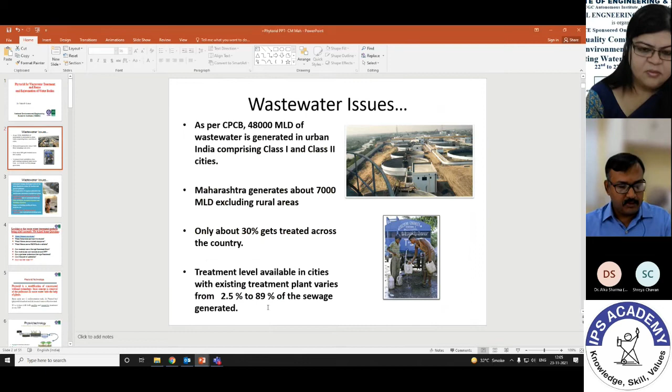The title of my talk today was Restoration of Lakes and Water Bodies. Is the slide visible? Yes sir, it's clear sir. Okay, great. When I was going through the contents, I thought let me reiterate some of the things which I wanted to talk about. So let me start by this slide, just for the sensitization of the students and the faculty members and other dignitaries in this talk.

What are these wastewater issues? As per the Central Pollution Control Board, 48,000 million liters per day of wastewater is generated in urban India, comprising class 1 and class 2 cities only. In Maharashtra, we generate about 7,000 MLD, excluding rural areas, and only about 30% of it gets treated across this country. The treatment level available in cities with existing treatment plants varies from about 2.5% to 89% of the sewage generated in these cities. So the treatment can be as low as negligible to as high as almost 90%, depending on the size and place of the city.

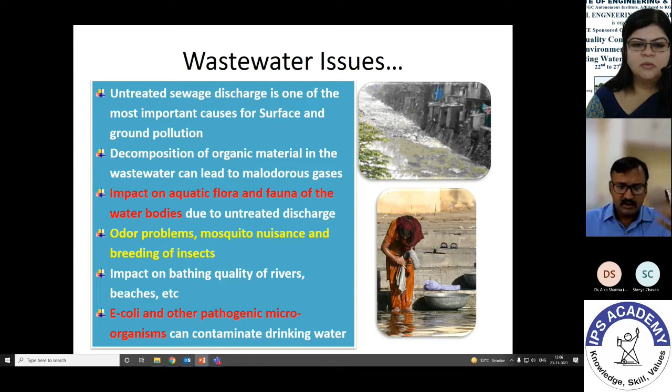Now, untreated sewage discharge is one of the most important causes for surface and ground pollution, which has been iterated regularly and which we all now understand very clearly. Decomposition of organic material in the wastewater generally leads to malodorous gases, impact on aquatic flora and fauna, odor issues, mosquito nuisance, and breeding of insects. Rivers are degraded, beaches are degraded. E. coli and pathogenic microorganisms can contaminate drinking water. So the list is endless. We have been reading all of this for a very long time.

A few years back, when researchers at NEERI were looking at the wastewater treatment methods which are still being used, they asked some questions, because most of these conventional treatment plants are dependent on certain conditions. The very first question: what if there is no power? The moment there is no electrical power, all of these treatment plants cease to operate, because you need power to run the motors, do the aeration, and pump the sewage. So we are dependent on electricity.

Question number two: what if microbes can't survive shocks? What I mean by shocks is shock loading. We all understand that in wastewater treatment there are times when there is a lot of inflow and times when there is very low inflow of sewage. These shock loadings normally are not very well absorbed by most treatment plants, and that leads to low treatment efficiencies, or sometimes untreated sewage actually flows out as effluent.

What if there is no trained manpower? Now, if people in this meeting have visited even one of these treatment plants, they must have seen that you need trained manpower to operate them. What if there are no operation and maintenance funds available? So these are some four questions which are basically related to the operational issues around our treatment plants, and which are very much the issues whenever we talk about a treatment plant not working.

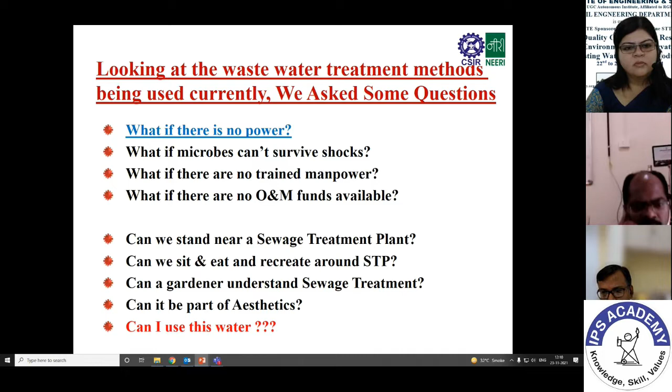So these are some of the questions which were answered in a patented technology by CSIR-NEERI, which is known as the PHYTORID technology, right? So PHYTORID is a modification of constructed wetland technology. So in my last talk, which I did with you, I talked about PHYTORID technology being employed, right? And I also talked about some of the applications last time. This time I would deal with another site-specific application in the next few slides.

But just for the information of the public at large, it is a modification of a constructed wetland technology. Basic concept is removal of the pollutants in wastewater with the help of plants. So we are using plants which are basically consuming all the biological oxygen demand of the wastewater. The basic units are not very different. There is a sedimentation tank, there is a planted bed, which is also known as the phytorid chamber, and then there is a treated water collection tank.

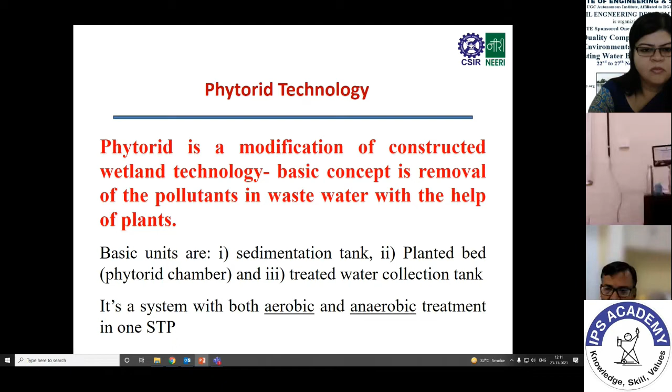So not many ancillaries. It's a very simple three-step process, and it's a system with both aerobic as well as anaerobic treatment in one sewage treatment plant, right? This is the typical schematic of it, which I had already talked about in my last talk. I'll just leave everyone to look at it for a minute.

So we have the sewage coming into the sump, then to the settling tank, then to the phytorid bed, and then the treated water tank, which is basically pumped for reuse, and it can be reused for the irrigation or gardening or farming, whatever. So some of the highlights is negligible maintenance cost. System looks like landscape and gardens. It doesn't look like a sewage treatment plant. It complies with the regulation laid down by CPCB and all state pollution control boards. Qualified for green rating credits by IGBC under water efficiencies, allows reuse of grey water up to 95%.

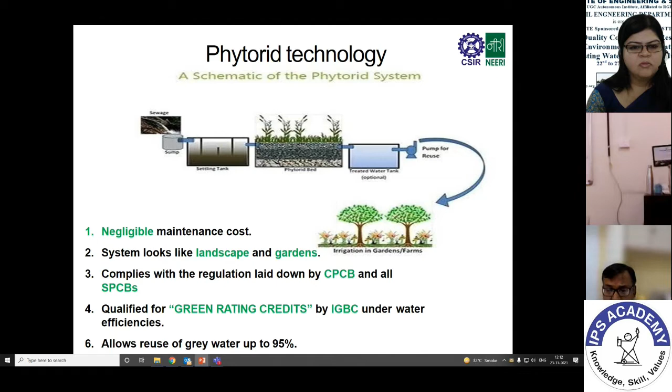Right. Some of the salient features also, it is included in national environmental policy, combines physical, biological, and chemical processes. There is no power requirement. There is low capital cost compared with a standard sewage effluent treatment system. Very simple construction, very low maintenance, no odor or mosquito nuisance, though sometimes it is reported, but it is basically because of some other reasons, not because of the technology. And it is aesthetic and it has a scalable design.

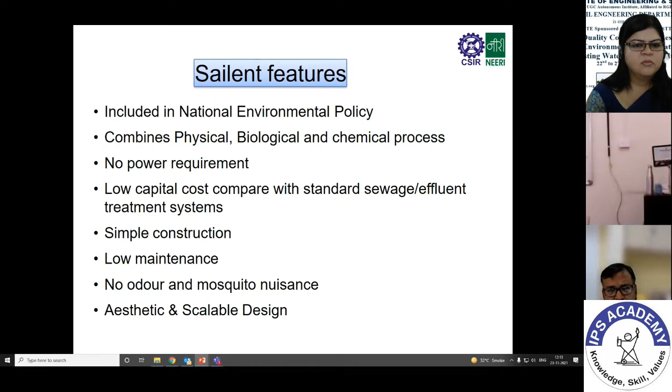So I would stop here with the features of the technology which I would be talking about today in one of the recent projects which CSIR-NEERI has completed, which is restoration of Jogila Lake at Panch Pakhadi, which is in Thane district, close to Mumbai. Right. So if you are aware of Mumbai, Thane is a sister city of Mumbai. So when we started the project, what does the lake look like, and why am I talking of lakes immediately after talking of phytorids?

Because a lot of this phytorid technology has been employed in cleanup of lakes of late, because it requires a small amount of land, and generally we have seen that most of the lakes or water bodies in the cities in our country are basically polluted by some ingress of sewage, right?

And making a very small 1 MLD, 2 MLD, 5 MLD sewage treatment plant using phytorid technology generally helps quickly rejuvenate the lake to its original form. And also the treated water can actually be fed into the lake itself, right? So that the lake is filled with water, right?

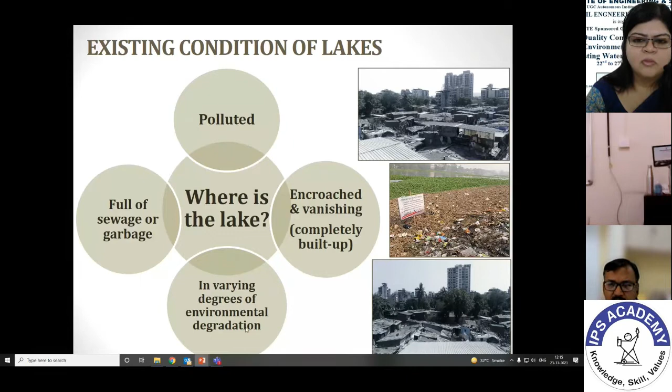So where is the lake? In these pictures on the right, we don't see the lake anywhere. When we got the project, we could barely see some part of the lake. Most of it is either full of sewage or garbage. It is encroached and vanishing, completely built up. In varying degrees of environmental degradation is what we can say.

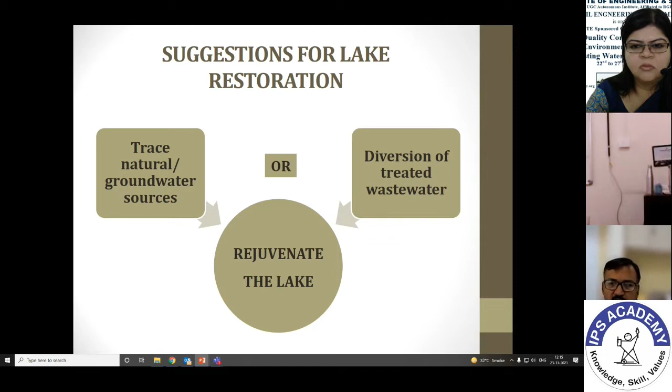So what were the suggestions for lake restoration? We said that in order to rejuvenate the lake, we can trace the natural or groundwater sources, or diversion of treated wastewater. These are the two things we can do for the restoration of the lake. But before that, what are the steps we have to take?

So these are some pictures of the lake right from the year 2000, and we can see that the lake area has been shrinking over the years. In 2000 it was almost this size, and in 2005 and 2010 we can see the encroachments all around the lake increasing.

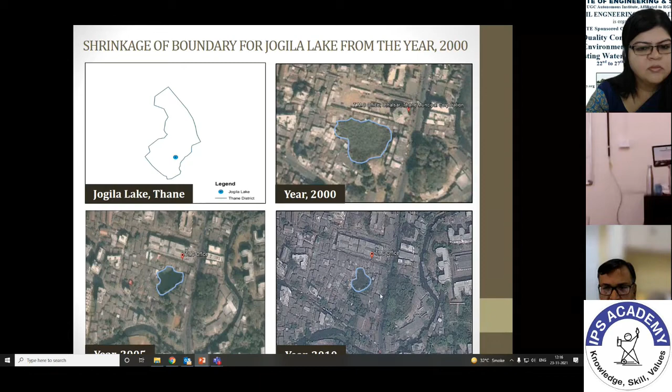So what was the update at that time? That Jogila Lake is lost under sprawling, probably unauthorized construction and rapid urbanization. Initially, it was observed that the entire lake bed was covered with concrete structures by slum dwellers and certain commercial establishments. When I say present, I mean 2019, early 2020, just before the lockdown. So that was the status then.

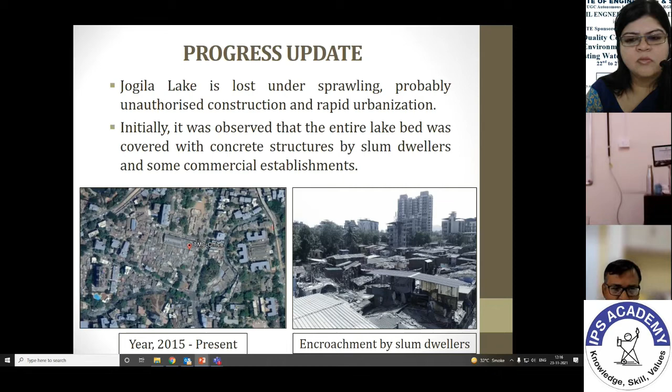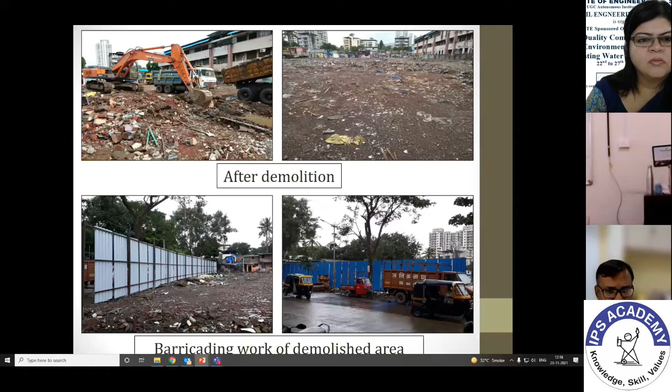So, encroachment of some slum dwellers can be seen, and the lake is nowhere to be seen actually. So the administration started demolishing the illegal structures, a lot of this was demolished, and barricading work was done of the demolished area. And we then delineated a scope of work so that a detailed project report could be prepared.

So what are the steps of a DPR preparation? I will discuss in a few slides. From the local municipal corporation we seek historical documents, city development plan, or Gaothan map indicating the location of the lake, and other available details, records or reports of the lake, such as the original area, the extent, the depth of the lake bed, and any data which would be valuable for the project implementation plan at the later stage.

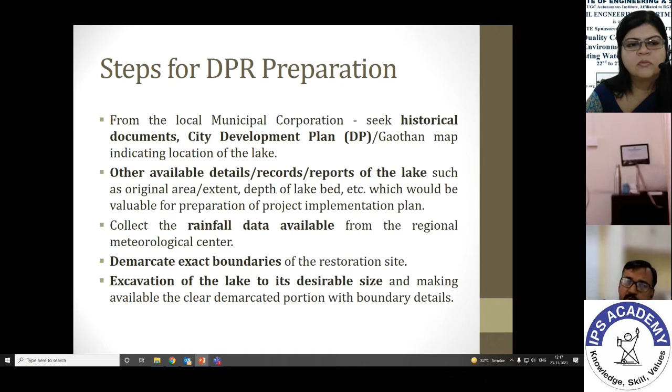Also, the rainfall data from the regional Met Center is to be collected, and a demarcation of exact boundaries of the restoration site, and it would also require excavation of the lake to its desirable size and making available the clearly demarcated portion with boundary details. So we get all of this information so that we can proceed with the DPR preparation. The other part of it is data collection and survey.

So total station surveys are required, contour mapping is required. We also need to do some testing on the soils to understand the bearing capacity. We do boreholes for permeability tests. Geophysical surveys are required. The natural stormwater drainage pattern of the area is very important to understand, because in a lot of places we have seen that because of construction activities and concretization,

the natural stormwater drainage pattern has been altered. So if we understand the original stormwater drainage pattern, we could still have some underground ways so that the stormwater can reach the lake, because stormwater is mostly clean. It doesn't require any treatment. It is pure rainwater, so it's very good for the lakes. Aquifer tests and analysis for wastewater quality are some of the other things which are also required.

Is there a question?

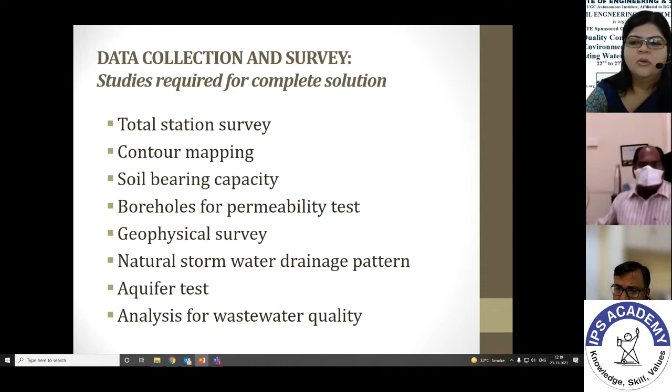Sorry, sir, there was some disturbance.

Okay, so what are the options now? So I talked about recharging the lake by natural streams and rainwater. So the approach would be to study the natural stormwater drainage pattern of the catchment area and the probability of these natural streams recharging the lake, because of urbanization, rapid urbanization. Probably the stormwater may never reach the lake, right?

A very classic case study, which is also being taught in first year engineering courses these days, it's also a standard textbook now, is how the lakes in Bangalore city vanished over the years. So it's a very pertinent and a very well-known factor that Bangalore was known as the lake city at some point of time.

It still houses a lot of lakes, but a lot of them were lost because of the increased demand of houses when Bangalore became the first Silicon Valley in our country. So a very rapid urbanization led to mass destruction of these lakes, and most of the lake beds were actually covered, and buildings were erected there.

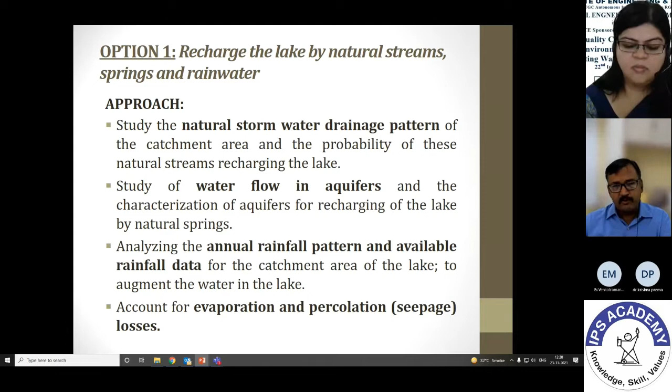Also, the study of water flow in aquifers and characterization of aquifers for recharging of the lake by natural springs, if any, in the area. Analyzing the annual rainfall pattern and available rainfall data for the catchment of the lake to augment the water in the lake, so as to understand how much water would normally be falling in the lake. And we also account for evaporation and percolation or seepage losses, right?

Option two is recharge the lake by diversion of treated wastewater. So if we do have any wastewater treatment plant around the area, can we actually divert some of that treated water to this lake? So quantification of volume of treated wastewater required for the recharge of the lake, provision of inlet and outlet arrangements of the quantified volume, conceptual design of the appropriate treatment system, and assessment of space adequacy. So is there a possibility of it?

We also go for the analysis of site-specific requirements related to installations, continuous operation and maintenance of the system. So just beyond the lake, is there enough space available for any kind of installations we want to do for O&M, right? Preparation of basic design for implementation of the recommended treatment option. So the treatment option is not only phyto; it can be any wetland technology or other conventional treatment methods. Provide a technology implementation plan along with detailed estimation of project cost, and then submission of the final report with design drawings and cost estimates for the execution of the project.

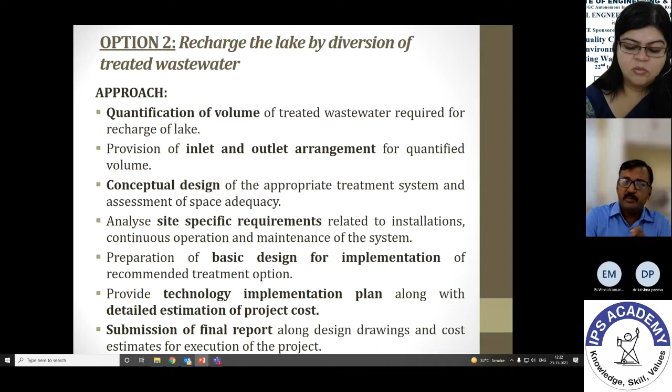So I'm basically taking it step by step from our experiences of doing this project, right? And this was the conclusion of our survey report. So the current site had four shallow open wells, which tap an unconfined aquifer. Most of the well water was polluted by percolation of domestic drainage water. Hence, using well water was difficult either for domestic or gardening purposes, and no bore well was located in the site. And the present water table showed a gradient towards the lake area. So that was a good part.

Silt, sand and clay formation of sedimentary deposit and jointed, fractured and weathered amygdaloidal basalt are observed, which were water-bearing formations. So the geology of the area is suitable for carrying the lake. The site may have both unconfined and confined aquifers, which was not very clear. The resistivity data showed that the average depth of bedrock or hard rock was about 6.5 meters below ground level. So there is scope to dig the lake up to 8 meters below ground level.

And if the groundwater is to be tapped, the lake will have to be further excavated below some 8 meters. And the final word was that the restoration of the lake will have to be planned and estimated by a combination of both natural resources and diversion of treated sewage or wastewater through sustainable treatment technologies. So that comes to the culmination of our initial almost a year of work, right?

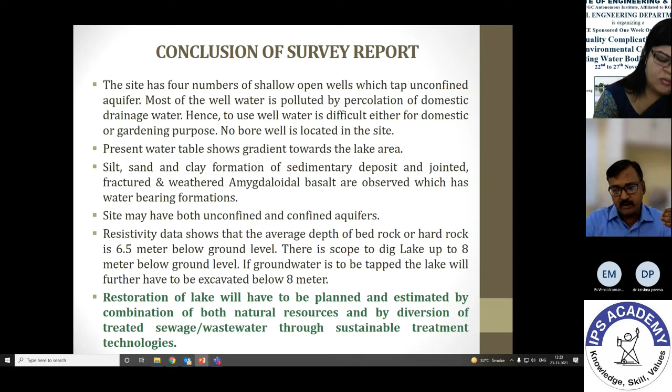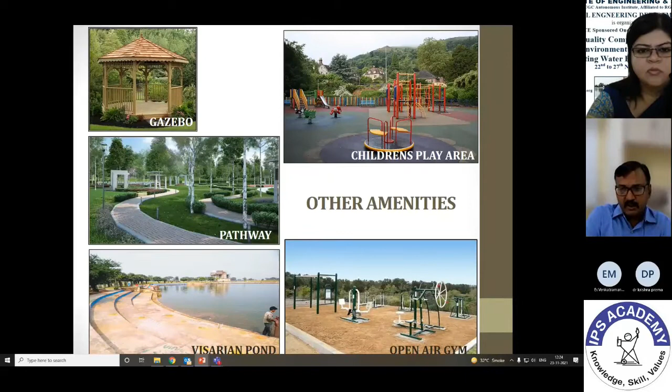These are some of the methods which had been employed in our previous studies, like Gabion wall structure for bank protection. So we have seen that normally, if you don't have these kinds of structures, the water may flow out of the lake, right? So these are some of the examples of it.

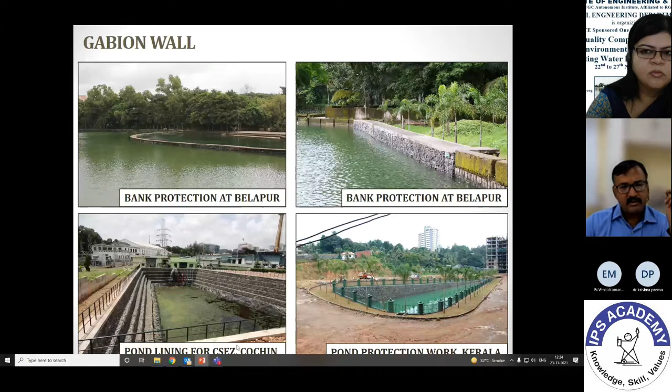These are the first two pictures. Bank protection at Belapur. These are in New Bombay, right? This is pond lining in CSEZ in Cochin, and this is another pond protection work in Cochin.

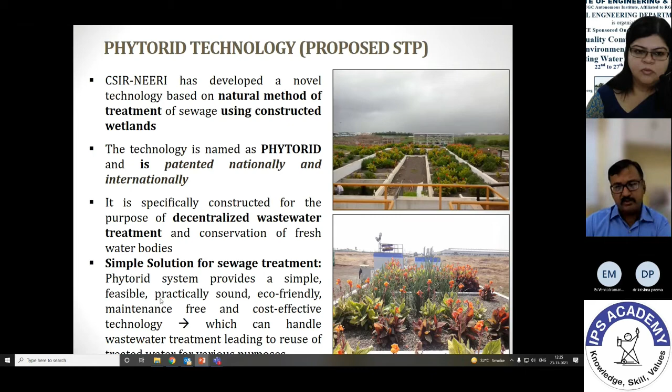And we proposed PHYTORID technology, the benefits of which I have already talked about. So, I will not go over this again, but I would just say that it's a simple solution for sewage treatment, right? It's eco-friendly, it was very much doable, right? And we have talked about filter media and plants, right?

So, the technology is basically a subsurface flow type technology, and the wastewater is applied to cells or beds, right? Which are filled with locally available porous media. So the filter media basically is a unit which is using gravel, stone, and debris, right, which is available locally, and some plants which are aquatic, semi-aquatic, or ornamental, and also flowering species at times.

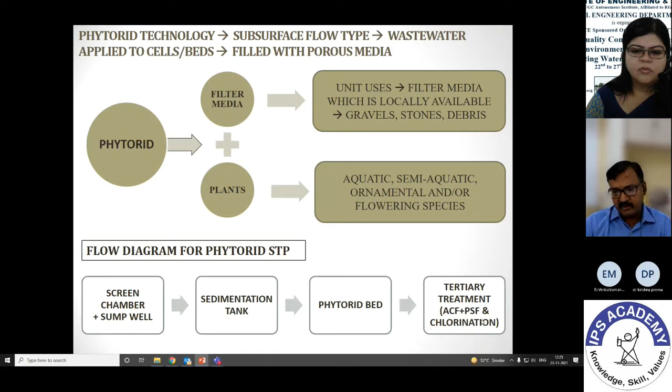So, as I said in the beginning, there's a screening chamber and a sump well, a sedimentation tank, a Phytorid bed, and then we do some tertiary treatment using ACF plus PSF and chlorination, right? And this was the last known status of the lake, which was in June 2019, right? So the barricading had been done, the excavation was in progress, right? Beyond that, the work got stopped because of lockdowns and no funds. Again, the work is now being started.

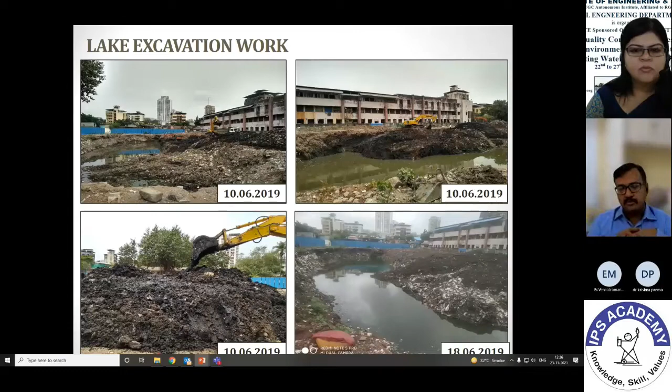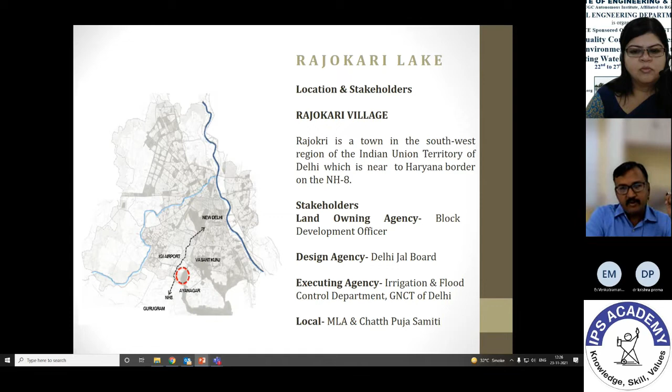So this was something which had been done very recently, so I wanted to talk about this work. I have other examples, like Rajokri water body, which we did some time back in New Delhi. It has some good pictures, so I thought let me share this one in this talk. So Rajokri is a well-known town in the southwest region of Delhi on the Haryana border, and the picture speaks a lot for itself.

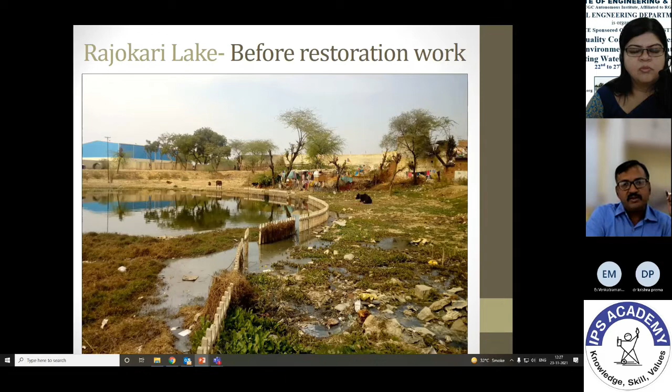The lake was totally sewage laden, and it was not in a very good shape, right, before we started the restoration work. And the site was fully enclosed by an existing boundary wall which was stopping the flow of surface water from a larger catchment area to the water body, and punctures had been created in the wall along the Abadi edge to allow surface drains carrying grey water. So instead of fresh water coming into the lake, grey water was actually going into the lake.

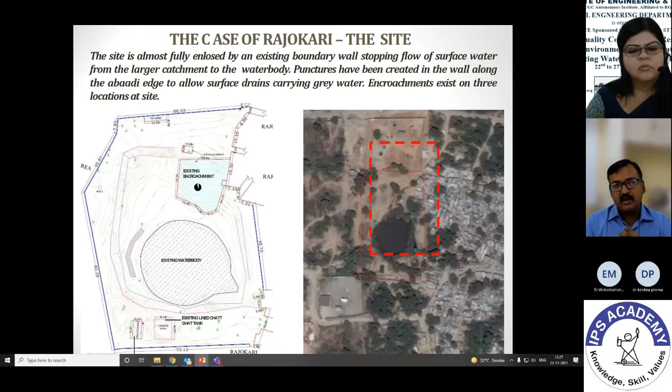Encroachments were observed at three locations at the site, right? High contamination levels were observed. Sustained solid waste disposal was there. Sludge deposits are there. You know, there was no willingness for anybody to even look at the lake, right? It was totally neglected, right?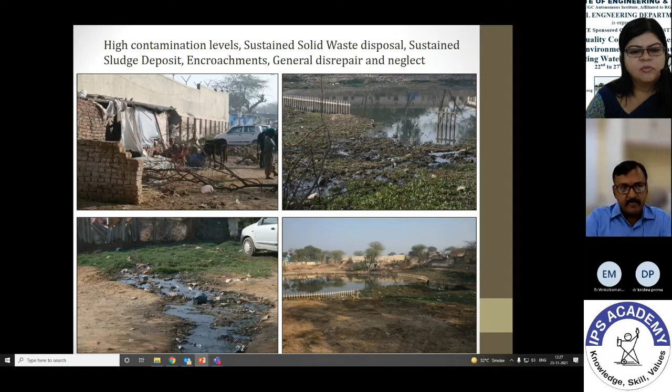So we came up with a restoration plan wherein we said how we can trap and clean the water body, how we can remove the historical sludge which is there, creation of enhanced capacity to hold monsoon flow at the site, then restoration of the larger catchment of the water body and its reconnection, right? Because the lake was covered by boundaries from all sides, the naturally flowing water was not coming to the lake. Appropriate creation of ghats in an environmentally friendly manner, which you will see in the pictures next, right?

Creation of ecologically designed and easy to maintain landscapes for use by the public, and putting in place a management regime which is sustainable for the long term, and which is workable with the community as a key stakeholder, because the people who are dwelling in and around that area are the ones who would hold it as a gem of that area. So if you create something very beautiful, people would not want to then further dirty it.

Like a very classic case of Indore city, which has now come number one in India again for cleanliness, right? Fifth time in a row. So congratulations, people of Indore, that they are again number one. And what I realized when I was last in Indore is that even if by mistake you throw garbage somewhere, somebody will stop you and say, boss, please pick it up and throw it in the dustbin.

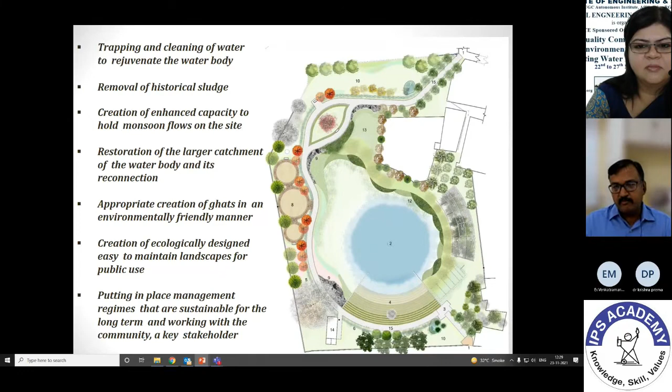That's what engaging the stakeholders is. People of Indore have actually taken it up: okay, now we are clean and we want to remain clean. And I think that is what is pushing it, more than any government policy, the participation of key stakeholders in the process.

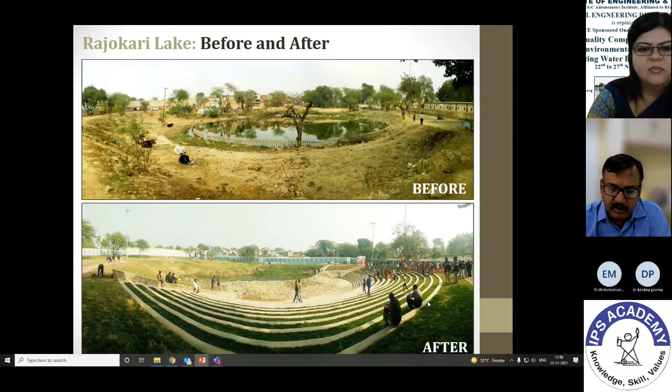And this is the Rajokari Lake before and after, right? So you can see the whole area has been transformed. The landscaping has been done in the picture below. You can see, right? So it was one of the very successful projects which was implemented by NEERI. So you can see the beautiful landscape now. So all these trees were there only. They were not planted. They are hundreds of years old, right?

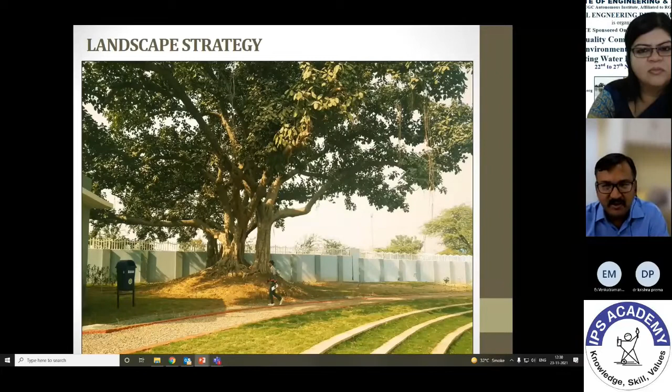But the whole area was restored, and the strategy was basically water harvesting, and then we created some swale and bioremediation grasses, seasonal ponds. So the levels and grading of the landscape was planned to facilitate water harvesting. The pathways and hard areas would all be connected through natural swales to catch the runoff from the ground. The grasses around the ghat would clean the water from the swale through bioremediation.

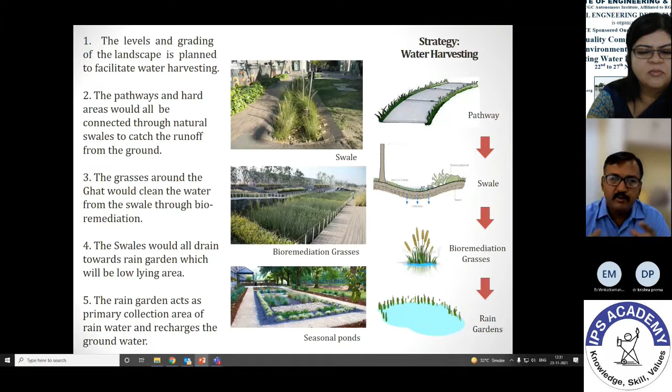The swales would all drain towards the rain garden, which will be a low-lying area, and the rain garden acts as a primary collection area of the rainwater and recharges slowly the groundwater. Right? So a very beautiful amalgamation of all the thought processes and landscape strategy. So this is another depiction of the same thing which I just said, how the drainage process would happen.

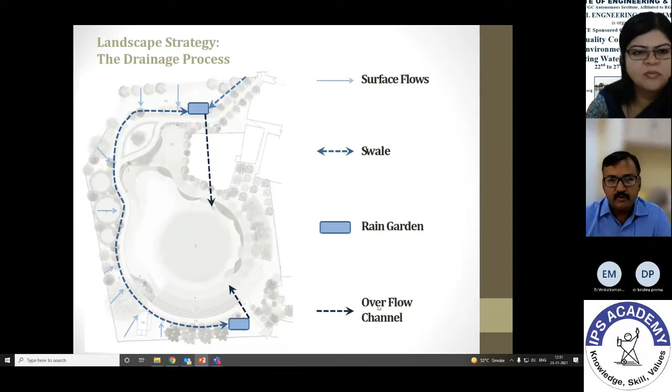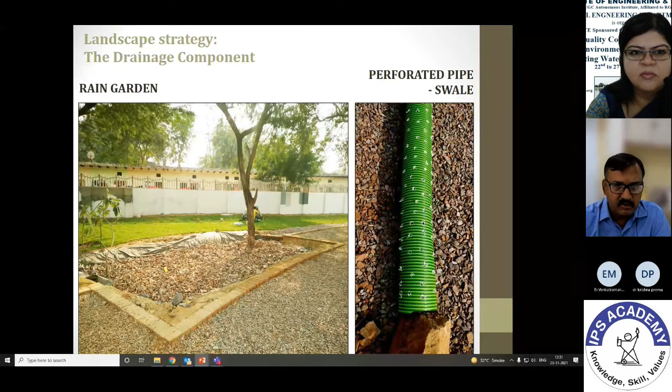And what was the ecological impact? We could restore the flora and fauna, right? Sighting of migratory birds, kingfisher and ducks was seen in 1 year of the project. Enhanced groundwater recharge with good quality of water was there. Clean water body resulting in eradication of diseases in the area. Social impact, huge social impact.

People were connected to the water body, right? People now have a community space for recreation. Children's play area is there. Safe public space. All antisocial elements and activities ceased to exist. Community ownership. The Chhath Puja Samiti ensured general upkeep of the water body, right?

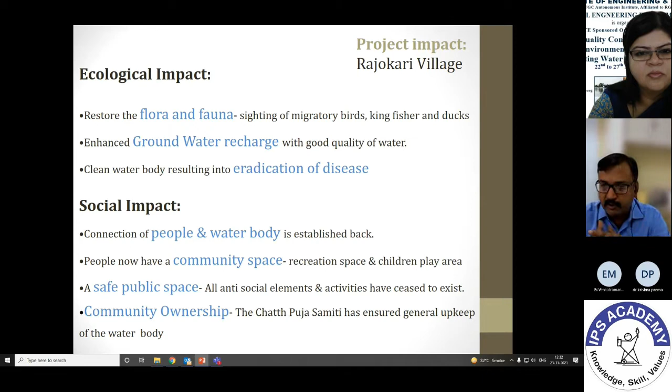So that is how we could actually engage local public participation and actually rejuvenate a lake. So it's not only the government, it's not only the policy, it's not only the fund, but it's also the stakeholders' engagement, which is very important when we talk of some of these cases, right? Another similar project by NEERI was Shahdara Lake, that too was in Delhi. So treatment of wastewater through Phytorid technology for revival of Shahdara Lake, with lake bed surface rejuvenation.

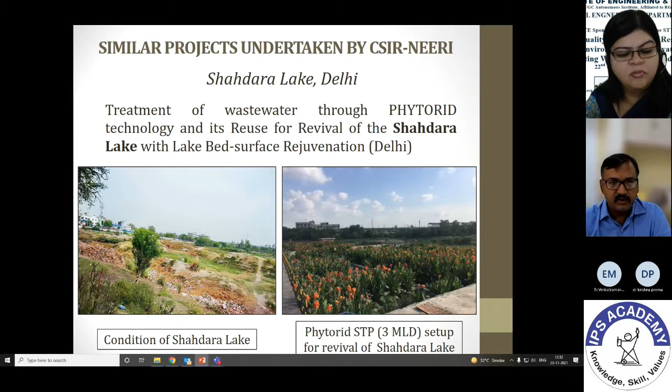Telibandha Lake, which is in Raipur, right? It was the ex situ lake treatment system. So treating inlet sewage before discharging it into the lake. Then we were combining two inlet streams into a single plant of capacity 1.5 million liters per day, right? Setting up a 1.5 MLD Phytorid-based sewage treatment plant, and it basically consisted of the same screening, sedimentation and Phytorid tanks. The in situ lake treatment was done using floating rafts.

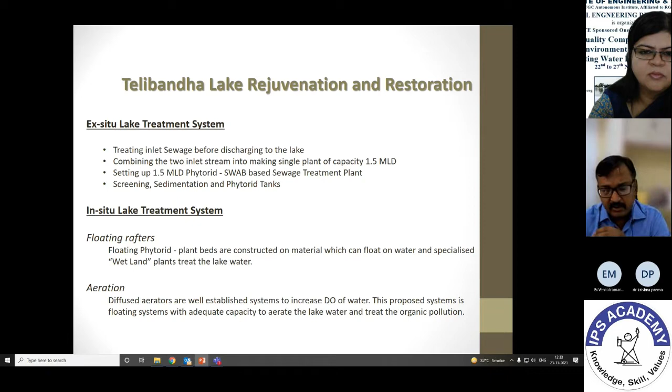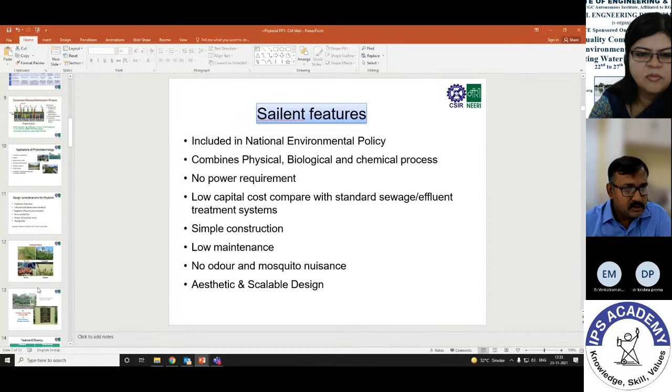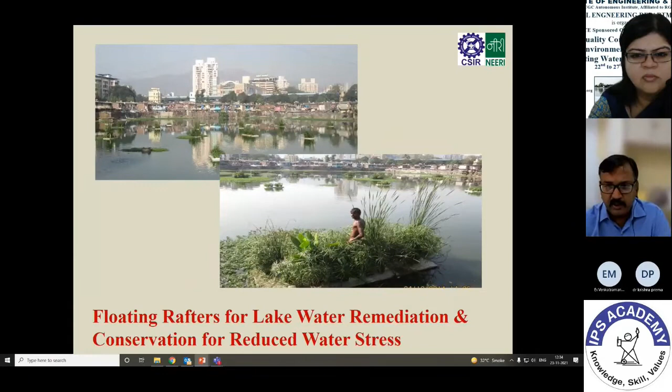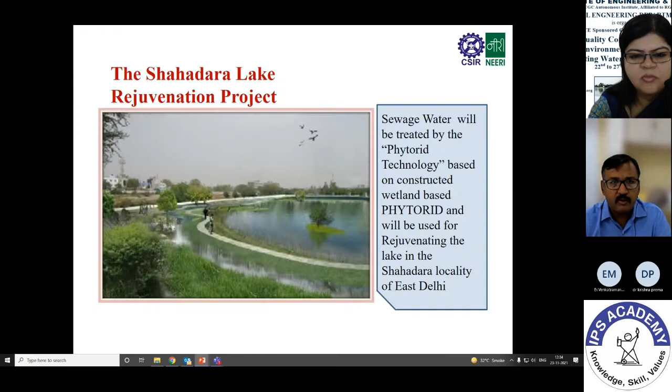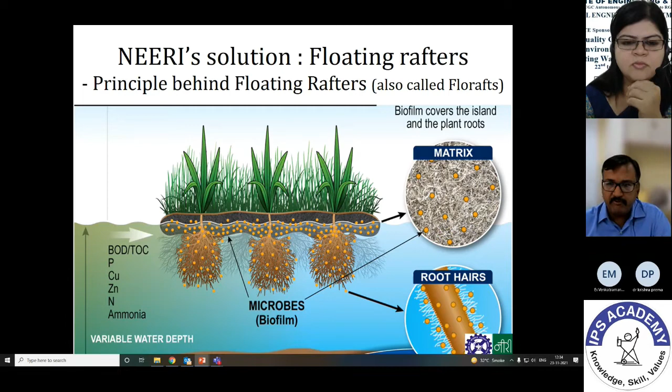And I come to this lake again, Shahdara, right? And what is NEERI's solution? What are floating rafts? What is the principle behind floating rafts? Also called florafts. So we all understand that there is a biofilm which covers the island and the plant roots, right? So there is a matrix of a light floating material, and the plants are actually sewn into that. So the root has actually developed a biofilm with microbes.

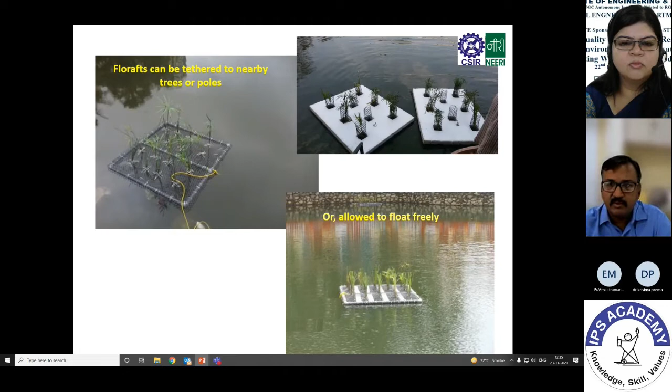These florafts can then be tied down to a nearby tree or poles so that they don't flow away, right? They stay in a narrow zone of water. And in these pictures, you can see some of the florafts which are designed. How does it work basically?

So carbon sequestration occurs, leading to fodder generation for cattle and biomass for fuel, which is about 50 to 70 kg per hectare per month. It reduces evaporative losses by almost 30% by covering the lake surface, and leads to growth of fishes, thereby aiding water conservation, local fishing and livestock feed.

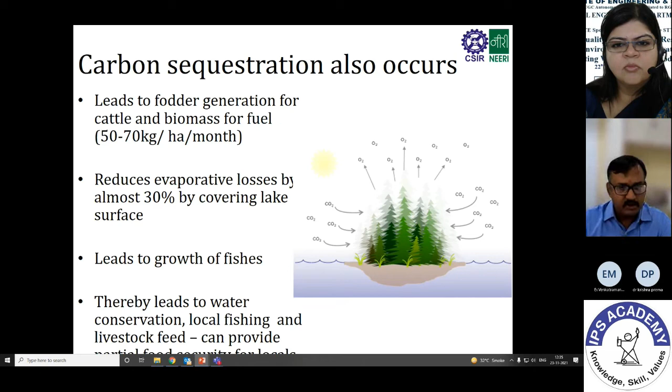This is another lake in Thane, Makhmali Lake. Before installation, it was highly eutrophic, clearly visible in the lake. After installation, these are the floating rafts which you can see in the lake.

The status before was BOD more than 200 milligrams per liter, TSS more than 180 mg per liter, phosphates and nitrates greater than 30 mg per liter. After installation, BOD reduced by almost 90%, in the range of 10 to 20 milligrams per liter. TSS also reduced by more than 90% to 10 to 15 mg per liter. Phosphate went down to just about 1 or 2, and nitrates were in the range of 5 to 10.

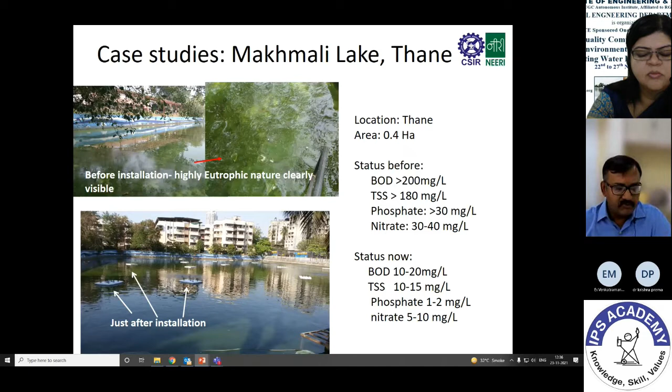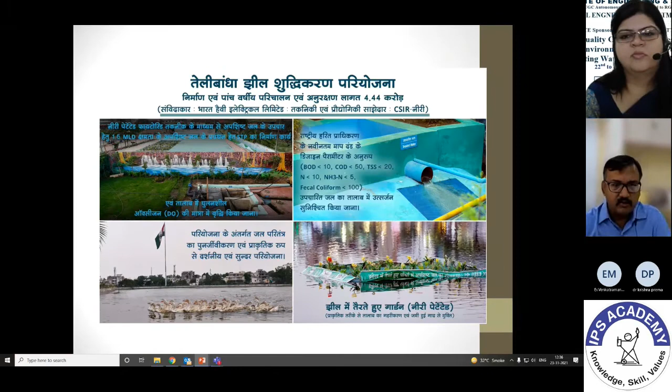So all this was achieved by just floating some plants in the lake body. These are some slides on floating rafters I wanted to share, along with some news clippings showing how the phytorid-based treatment plant has done great. The Telibandha Lake model also bagged the National Excellence Award, and Raipur Smart City got the National Excellence Award.

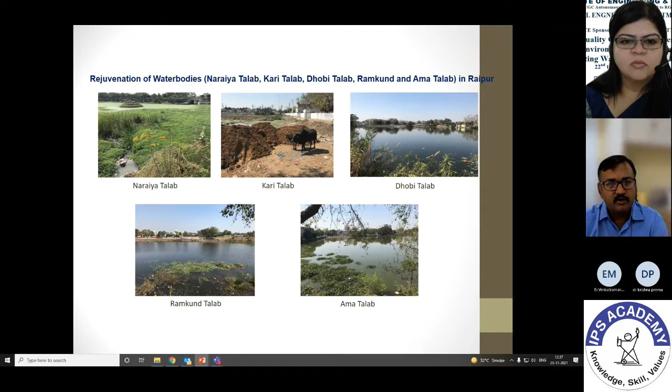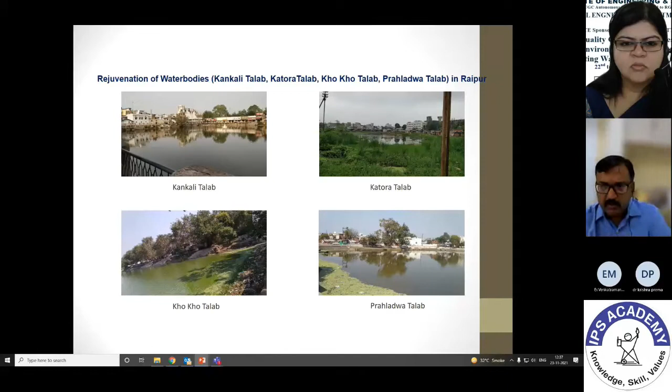These are some of the other water bodies where we are working in Raipur now - Naraiya Talab, Kari Talab, Dhobi Talab, Ramkund Talab, Ama Talab. You can see all of these are not in great shape right now. And then there's Kankali Talab, Katora Talab, Kho Kho Talab, and Prahladwa Talab. So a lot of work is being done.

I would want to stop now, and say that the presentation is adopted from reports of various studies by scientists and technical staff from CSIR-NEERI, who are highly acknowledged. The inventors of PHYTORID technology and florafts are also acknowledged. Thank you, I'll be happy to take questions.

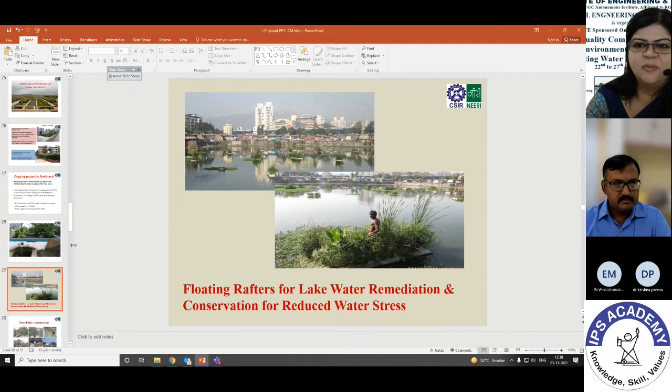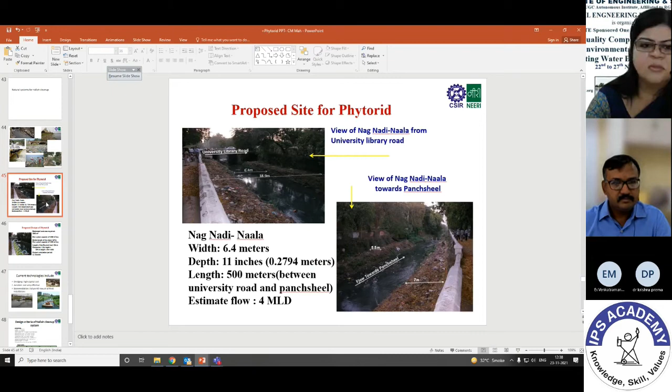Can phytorid be used for restoration of nala and canals as well?

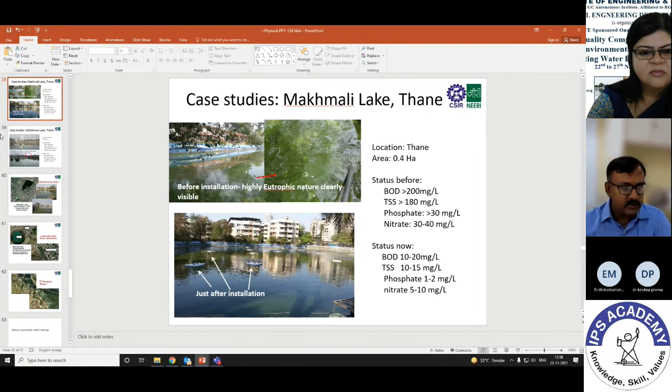Thank you for asking. That was precisely what was left out. We have been working on Nala cleanup, so let me share a few slides on it. Yes, I missed the Nala cleanup part of it, and thanks for asking.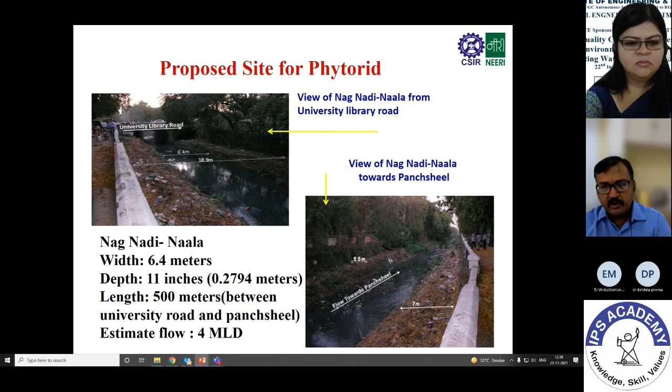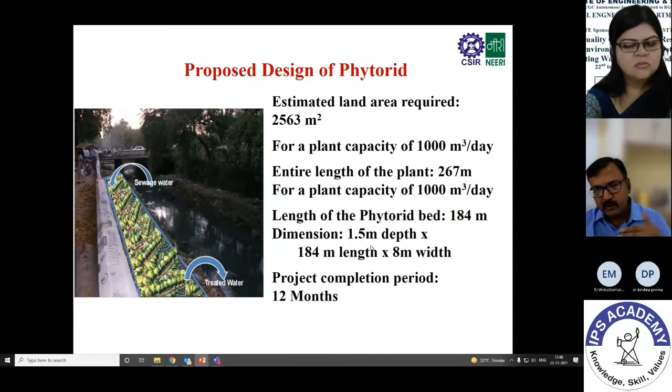Length of 500 meters between University Road and Panchsheel was adopted to install the Phytorid system, with a plant capacity of 1,000 cubic meters per day. Entire length of the plants which we estimated was 267 meters, and length of Phytorid bed was 184 meters, about 8 meters wide and about 1.5 meters deep.

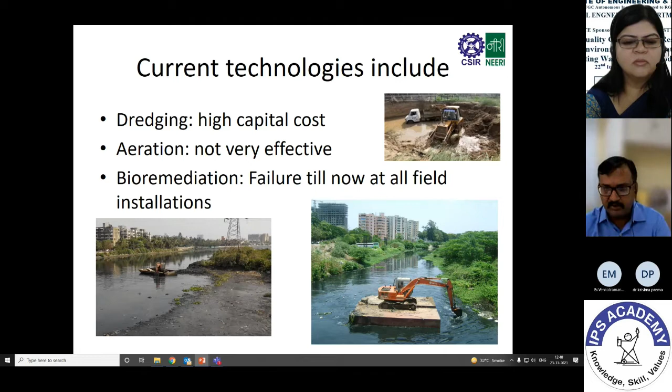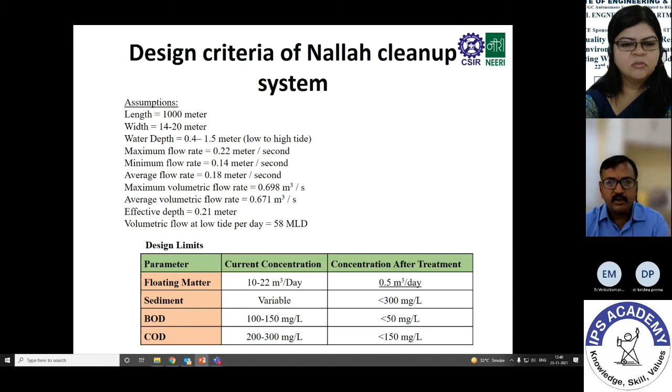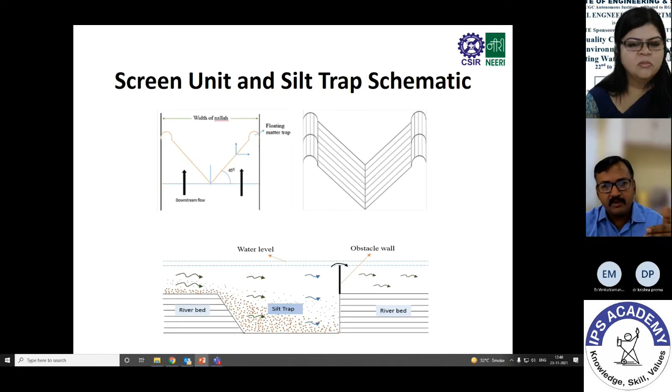So, anybody else who would like to ask anything?

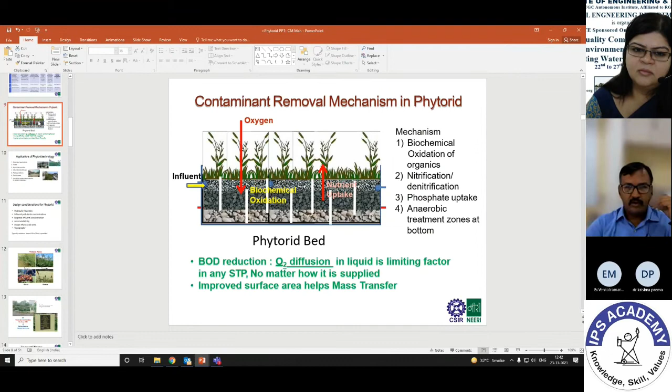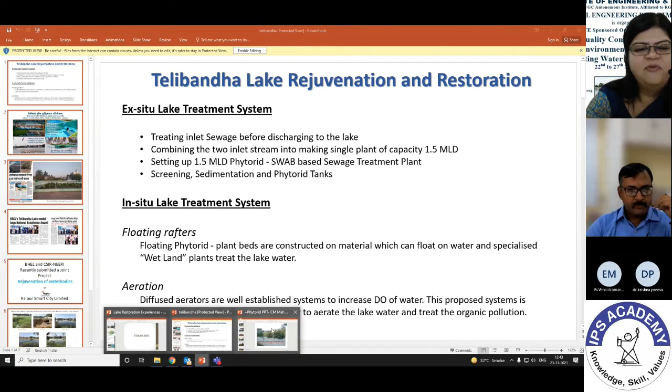Okay, I will just go to that slide. So we have an array of plants which you can use there, right? We have wetland plants such as bulrush, nutsedge, canna, cattails, which are locally available. We can also go for flowering plants, grasses, trees, and climbers around that area. If you're typically talking about plants used in phytorid only, then these are the ones I mentioned, which are basically wetland plants.

Most of this phytorid technology is implemented through technical know-how transferred to the license holders of NEERI technology. So you can contact the NEERI headquarters, and they will let you know who the partners are, as they have all the technical know-how on how to implement it.

Venkatramanji, did I answer your question? Venkatraman sir, do you have any other query? Yes sir, thank you very much, sir. Thank you so much.

So, anybody else from the participants?

So there is no restoration work in Indore regarding phytorid? No, currently in the last 1.5 years things have been slow. We were in talks with a lot of smart city people, but there are a lot of projects going on. My senior Dr. Ritesh has been working closely with the MP government, so I'm sure he might have some news around it which I'm unaware of right now, but I'll let you know. Otherwise, I've heard some things have been done in other towns in MP, but for Indore, I haven't heard about it.

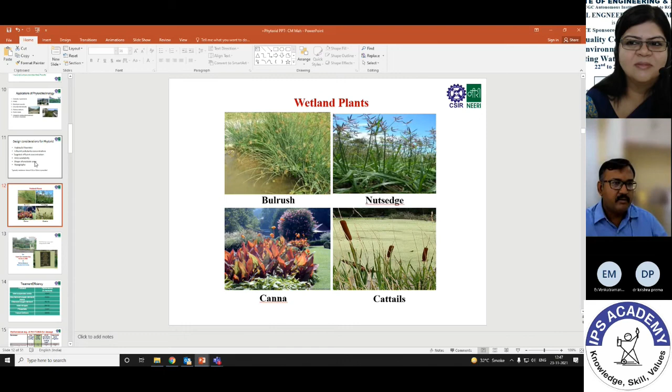Did you also test the water after installing the phytorid system? Yes, I talked about it last time, that's why I didn't cover it much today. But if you look at the efficiency of phytorid treatment...

This is a performance comparison with other technologies, based on published data. BOD removal is 87 to 95%. Sludge generation is negligible. Equipment required is minimal, excluding screen and grit removal, mostly gravitational flow. Unlike conventional systems, it doesn't require a skilled operator or any power.

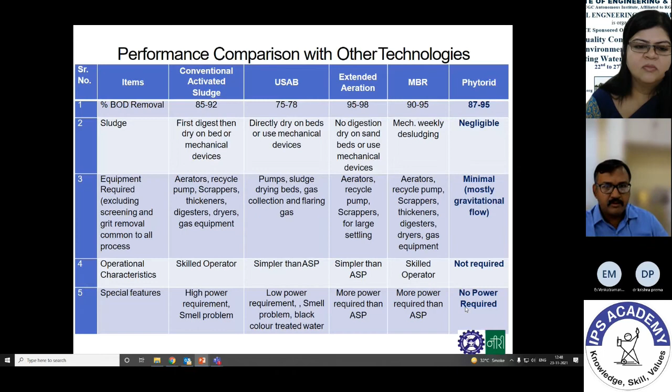These are the mechanisms, applications, and design considerations, along with the treatment efficiency of the first phytorid plant, established in 2006 at the Kalina campus of Mumbai University. These are the percentage removals achieved, and from 2006 to 2021, over 15 years, the technology has grown.

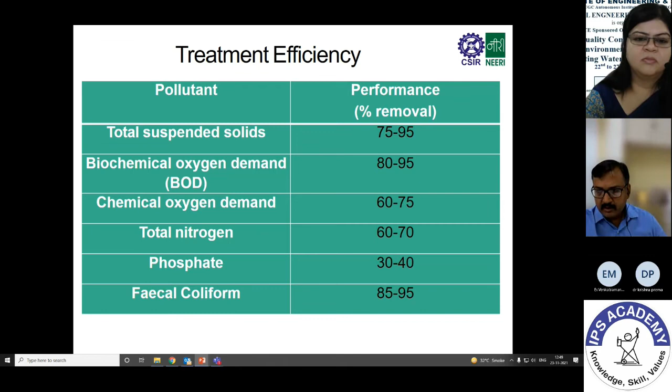It started with a very low loading rate, and now I've heard people have scaled it up to 10, 20, maybe even 50 MLD. So it's definitely a scalable technology.

Regarding application on an individual home basis, is it possible, sir? Like independent houses, or can a community even use this? On a community basis, we can say yes, because we need a certain minimal flow. But I haven't heard of any experiment yet for an individual home basis. Maybe I should find that out.

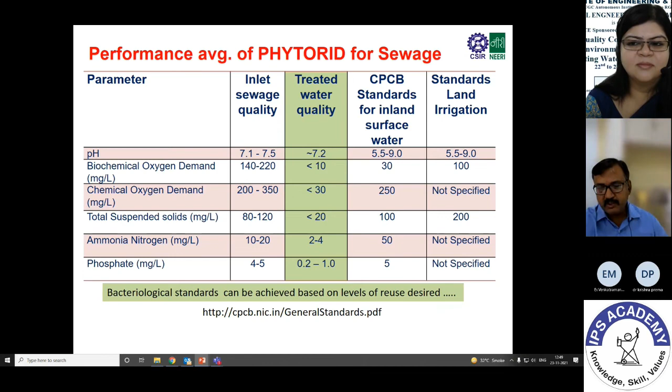Maybe what you're looking at is a colony basis. It can be done like in Indore, where there are so many colonies, so it can be done at that community level. It will also give you a good garden and some greenery in the area where the sewage is flowing. So it can be done, especially for open nalas and drains—those can be treated well.

Thank you so much, sir, for the wonderful technology you've shared with us. Thanks to the inventors of the technology—I am only a spokesperson today. A lot of good work still needs to be done. Thank you for inviting me to share some of this work.

The way you explained it was very nice, sir, thank you so much. I've been a teacher all my life, and I love to talk. The only issue is I can't see students now, only my screen. But it's always a pleasure to come back to any classroom and share information and knowledge.

There are some advantages that we get knowledge from you, but some disadvantages that we're not able to interact with you in person. No, no, but I think things are opening up now, so maybe next time we should meet in person, and I can come to your college in Indore—that's always fun.

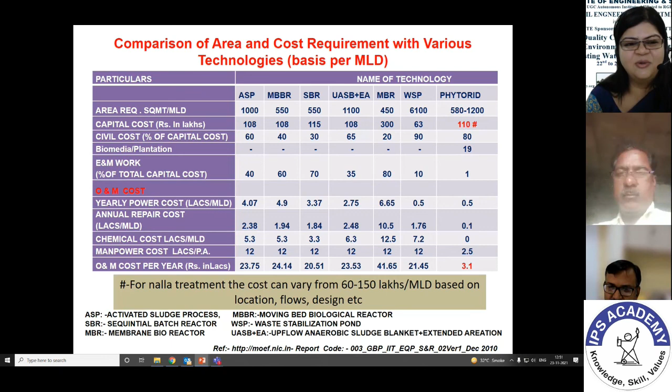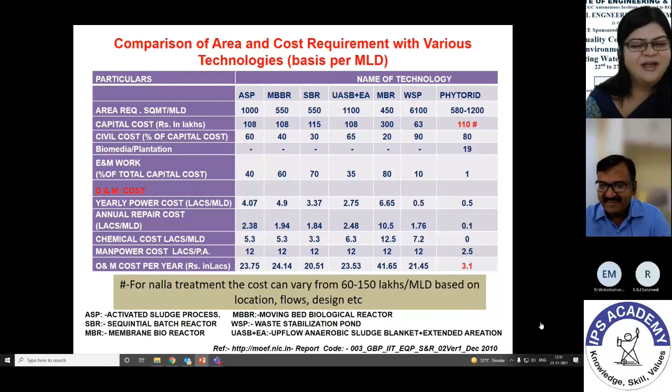Thank you so much, sir, for giving us such valuable information and taking time from your busy schedule. I hope I finished in time. I think we're actually early—you gave me an hour and we finished a bit quickly. Whatever knowledge we get, even in short time, is more important than sitting for 1.5 hours and not understanding a single point. It's better to keep it concise but understand the basic concepts.

Thank you so much, sir. We look forward to meeting you in person sometime. Sure, sure, bye. Thank you again, bye sir. Bye everyone, thanks for listening.